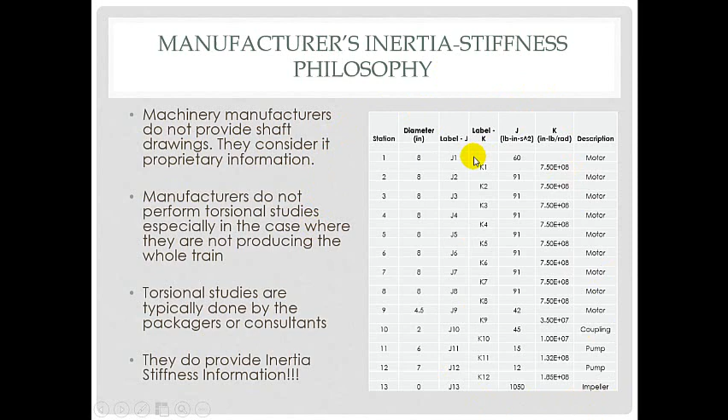so instead of providing shaft drawings, they calculate the inertias and the stiffness information, and they provide it in a neat table like this shown here, which they call the inertia stiffness model. What they do is take their rotor, for example this stepped rotor, which is just an example that I came up with, and they calculate the inertia and the stiffness for you, and then they put it in a neat table, and this is the information that you can use to do your torsional analysis.

Now, again, like I said, a lot of experienced people say that this inertia stiffness table comes pretty close to what is actually out there, but at the end of the day, it boils down to experience. It boils down to whether you can take real measurements in the field. But for the most part, these values can be trusted. But again, as a caution, if you have an opportunity to get more detail, always go for more detail in a torsional analysis.

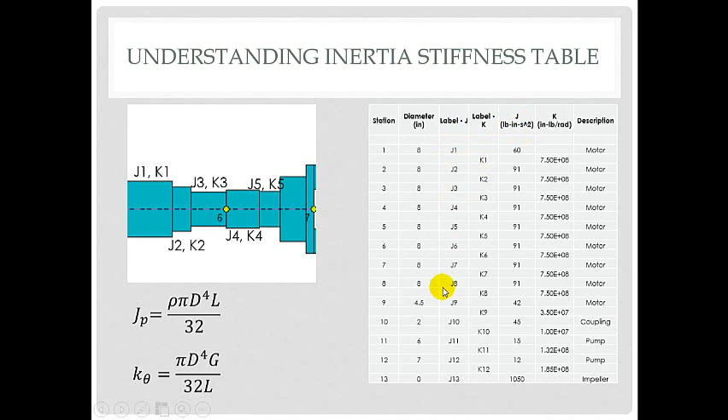So what they do is they take this shaft information and convert it to inertias and stiffnesses, and then they produce this classic inertia stiffness diagram that you see in a lot of vibration textbooks.

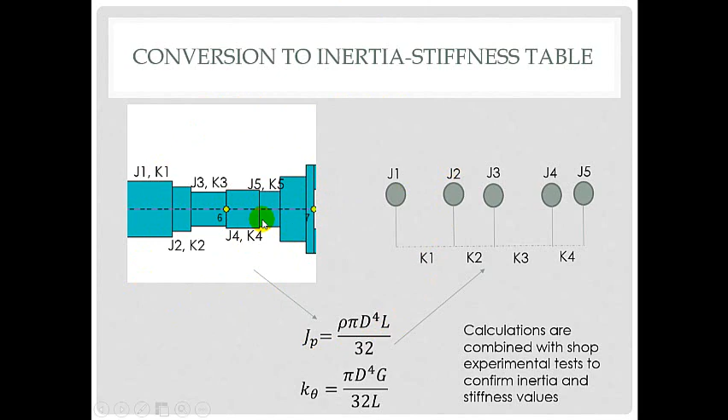And they combine these calculations with a lot of shop experimental tests, and they confirm their inertia and stiffness values. And of course, when you're out there in the field, when you take your torsional vibration data from field data, then you have a pretty good understanding of whether your calculated inertia values and stiffness values are close to what the manufacturers have predicted. So this is the way they go. They don't provide you this information, but they do provide you the inertia stiffness table.

So without further ado, I'd like to go ahead and model this inertia stiffness model. This is pretty close to a real system out there. I've changed up some values just to explain this a little better. And what you have is a motor that is driving a pump through a coupling, and the pump has an

impeller. So, the motor manufacturer has provided these individual inertias and individual stiffness information, and the coupling manufacturer has provided their inertia and their stiffness value, and then the pump manufacturer has provided their inertias and their stiffness values. So the entire model that you put together is going to consist of the inertias and stiffnesses of each particular

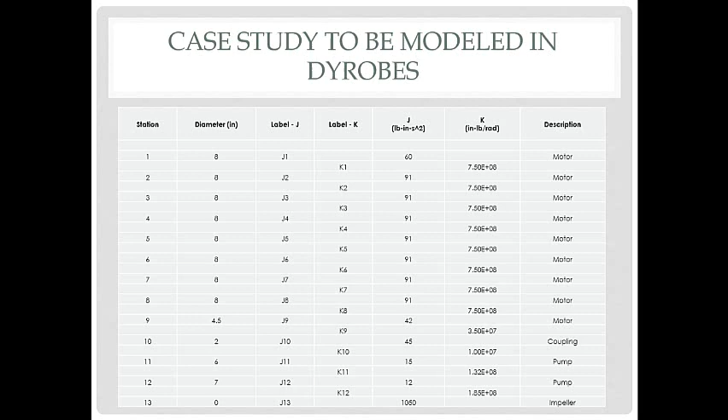component in the rotor. So without further ado, let's fire up DyRoBeS and let's go ahead and model this particular case study. And what we're going to do is we're going to shoot for calculating the torsional natural frequencies and the mode shapes for this particular model. See you in DyRoBeS. Hi guys, so let's get started.

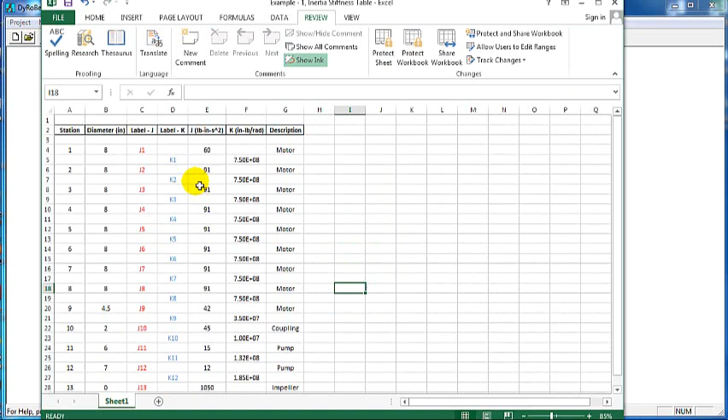I have DyRoBeS fired up here, and I've created this inertia stiffness model in an Excel spreadsheet, and of course this spreadsheet will be available on the website along with the DyRoBeS file and the presentation. So I'll park this Excel spreadsheet to the side here so that we can use it as a reference, and I will fire up DyRoBeS.

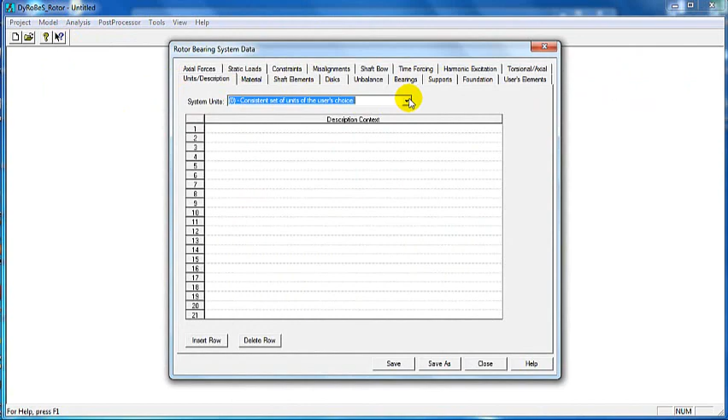And first thing you do, of course, is start with data editor like we did in the past, and of course you will start with your consistent set of units. So you got to pick your units. I have consistent English. Give it a description: inertia stiffness model of motor, pump, and coupling. Right, and then go ahead and click on material.

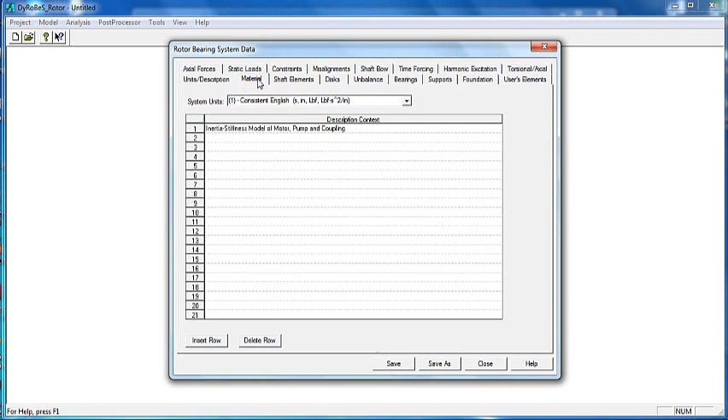Click typical steel, but of course don't forget this is an inertia stiffness model, so it doesn't matter. We're going to be setting all of these to 0 just like we did in the last lesson, and I always like to call them dummy material. And then after that, click on shaft elements.

So the goal of modeling this is to show you how to model a full system using the inertia stiffness method. Now, unfortunately, since we're using the demo version, we're only limited to 5 elements, and in this particular model we have a total of 13 elements. So we'll not be able to calculate the torsional natural frequencies and mode shapes due to the limitation.

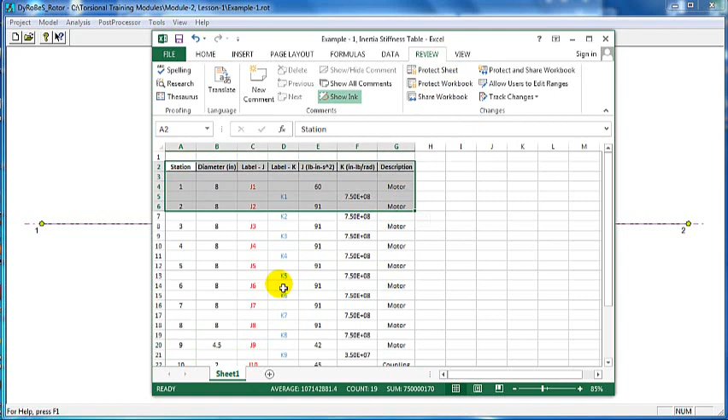But I will post the torsional natural frequencies and mode shapes so that you will be able to see what they are for this particular model. Now, if you happen to have the full version of DyRoBeS, then you will be able to calculate the torsional natural frequencies and mode shapes.

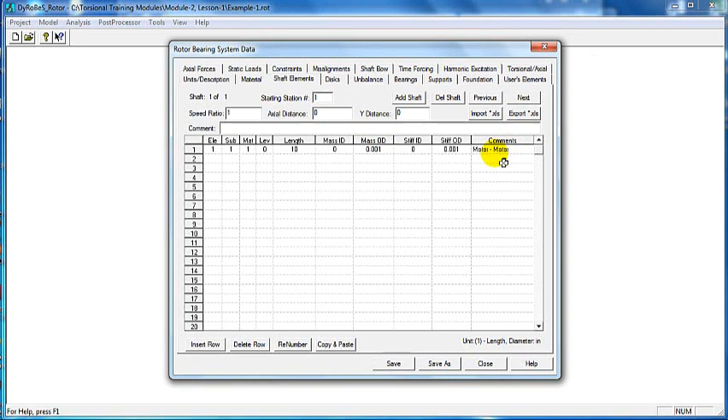So click on element and type in element 1, sub 1, material 1, level 0, give it a random length of 10, mass ID 0, mass OD 0.001, stiffness ID of 0, stiffness OD of 0.001, and call that motor to motor. And I'll explain why I wrote motor twice. Before you do anything, click save. Close, yes. In my case, I've saved it as example-1. You can save it as example-1 as well.

Now, here's one element, right? And this one element has 2 stations. It has station number 1 and it has station number 2. So, why I typed motor to motor under shaft elements is because when you type in an element, you're connecting two stations together by this element, and so this station is going to have inertia number one, which is here, right? And station number two is going to have inertia number two, right?

And they are connected by spring number one, right? K1. So station number one to station number two are connected by element number one. So that's why, if I gave this element a description, then the two that are connecting this element is motor to motor, right?

So it's not as obvious here, but if I scroll down to this part where now the motor and the coupling are connected, then I would call this element motor to coupling, right? So same thing, and in this case I would call this coupling to pump, and then in this case again it'll be pump to pump, right?

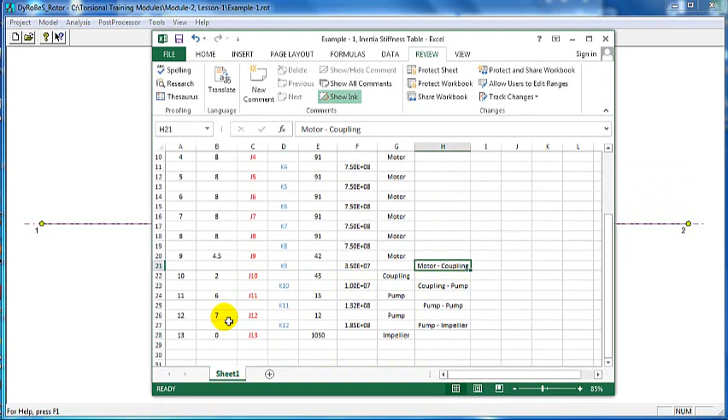So coming back to the rows, we have a total of 9 elements connecting the motors. Then one element connecting the coupling to the motor, one element connecting the coupling to the pump, one element connecting the two pumps together, and one element connecting the pump to the impeller. So in all, we have a total of 12 elements.

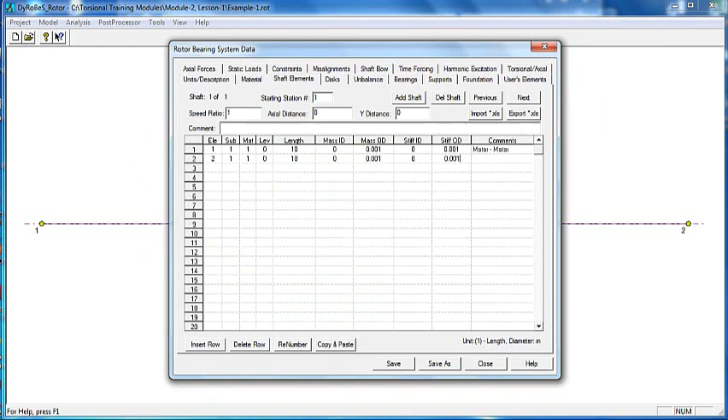So let's model this. Element number 2 will have a sub 1, 1, 0, give it a length of 10, 0, 0.001, 0, 0, 0.001, and again remember it's going to be connecting from motor to motor. This repeats for the next 9 elements, and your screen will look something like this.

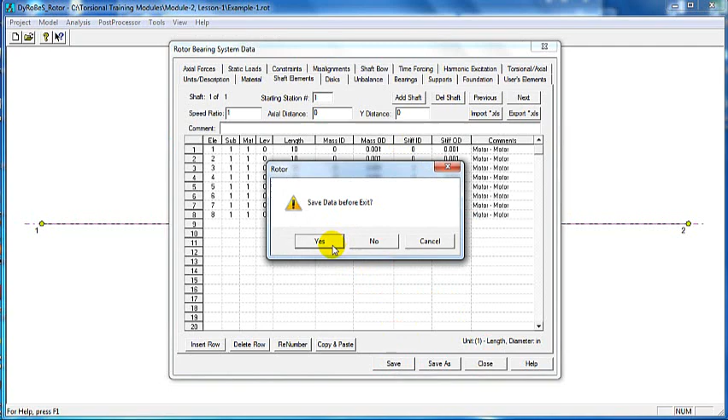So you have a total of 8 elements for the motor - previously I said 9 elements, but I made a mistake there. I meant to say 8 elements and 9 stations. Go ahead and click save after you type in all this information just like I have typed it in. Hit close, save data, say yes, and there you go. Now you have 8 elements and 9 stations.

So this will belong to J1, that'll be J2, J3, and so on and so forth until you have J9, right? And if you come back to your mass elastic spreadsheet or your inertia stiffness spreadsheet, you will have a total of 1, 2, 3, all the way to 9 inertias that correspond to the motor, right?

Then going back, now let's go ahead and model the rest of this inertia stiffness table. Go back to model, data editor, click on shaft elements, and element number 9, 1, 1, 0, 10, 0, 0, 0.001, 0, 0, 0.001, and now it's going to be motor to coupling, right? Pulling up the spreadsheet again, we have element number 9, that's between the motor and the coupling, and the element is called motor dash coupling.

Number 10, 1, 1, 0, 10, 0, 0, 0.001, 0. That's going to be coupling to pump, I believe. Let me confirm this. Yes, coupling to pump, right there. And then the next one, 11, 1, 1, 0, 10, 0, 0, 0.001, 0, 0.001. It's going to be pump to pump.

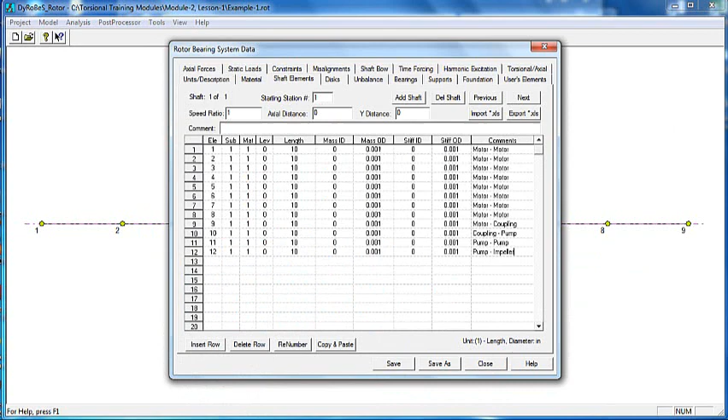The last element is element number 12: 1, 1, 0, 10, 0, 0.001, 0, 0.001. I believe that is going to be pump to impeller. So now you have a total of 12 elements and 13 stations, which corresponds exactly to what you have in the mass elastic spreadsheet. You got 13 stations right there, and you got 12 elements, right?

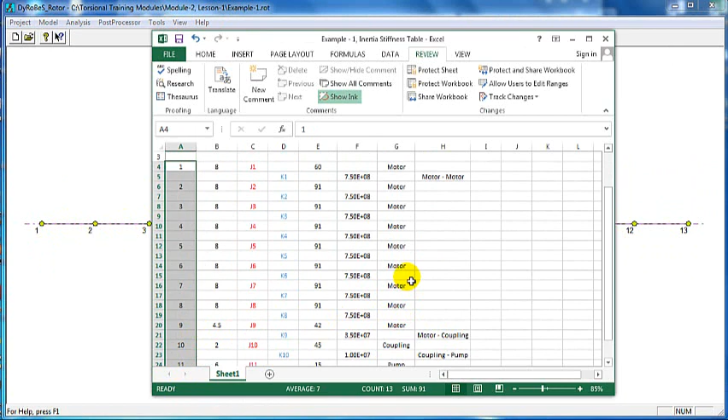So now, after you're done modeling your elements, the next step is to put in your inertias. Just like we did last time, click on disks and it opens up this disk menu. Remember, we're dealing with torsional information, so it's a rigid disk, and station number 1 will have no mass, no diametral inertia, but it does have a polar inertia. So go back, and your J1 has a polar inertia of 60, so we put in 60, and ignoring the rest, you can call this J1.

Similarly, number 2 has 91, and I believe the next 7 inertias, 2, 3, 4, 5, 6, 7, belong to the motor, and they're all 91. So your inertia table should look something like this, right?

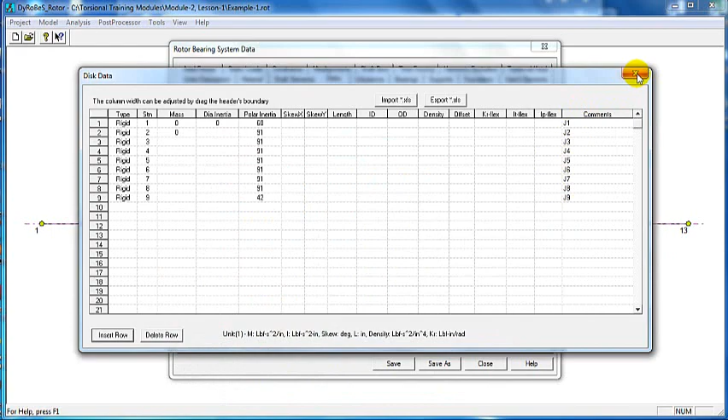And then the last inertia in the motor, inertia number 9, I believe is 42, so we'll put 42, and that's going to be labeled J9. So after inputting all of this, close this, hit save, hit close, hit yes, and there you go. You have your first 9 inertias that have been put in to model the motor.

So let's repeat this process for the coupling, the pump, and the impeller. Go back to data editor, click on disks, rigid number 10 of course has a value of 45, so station 10, 45, and it's going to be J10, rigid 11.

Your next inertia, J11, is 15, and it belongs to the pump. Inertia J11, and I believe the next one is also the pump, yes, and it has a value of 12, so J12, and last is the impeller.

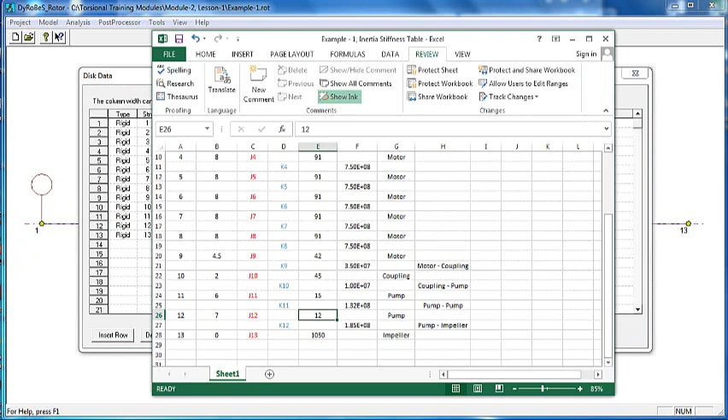I believe it's a pretty big value, yes, 1050, it's a pretty big inertia, which makes sense. An impeller will have the largest inertia in the pump, so that's going to be J13. Hit close, hit save, hit close again, and there you go. All your inertias are modeled in.

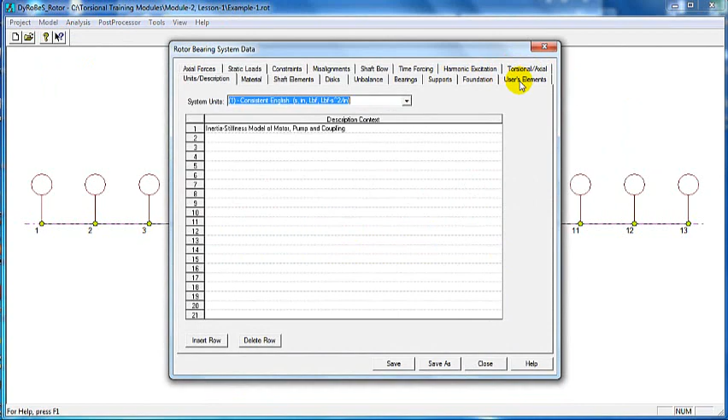So now the last step is to model in the stiffnesses, K1 all the way through K12. Let's go ahead and do that. Click on data editor, and if you remember last time we clicked on torsional/axial, and this is a linear model, so click on linear connectivity, and let's get started.

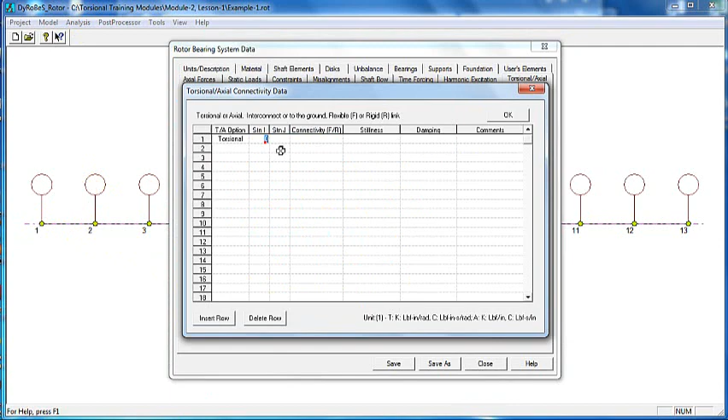T for torsional. Now remember, we're connecting station 1 to station 2, so going back here you have your K1, which is in between station 1 and station 2. Since it's torsional, we have a flexible stiffness, and your stiffness value is 7.5 e to the 8 inch pound per radian.

There's no damping, and remember, it is motor to motor, so you can call this K1. Torsional, 2 to 3, flexible link, 7.5 e to the 8, 0 damping, you can call this K2. This repeats for the next 8 or 9 stiffnesses for the motor, and your final screen should look like this.

So I have all the torsional stiffnesses modeled in for the motor shaft, and each of them had a value of 7.5 e to the 8, so let's confirm that. See, we had all 7.5 e to the 8.

Now let's put in the last few torsional stiffnesses. Torsional, connects 9 to 10, flexible link, and now we're connecting the motor to the coupling. So we have 3.5 e to the 7. Call it K9. And I like to always remind myself where I am, so motor to coupling.

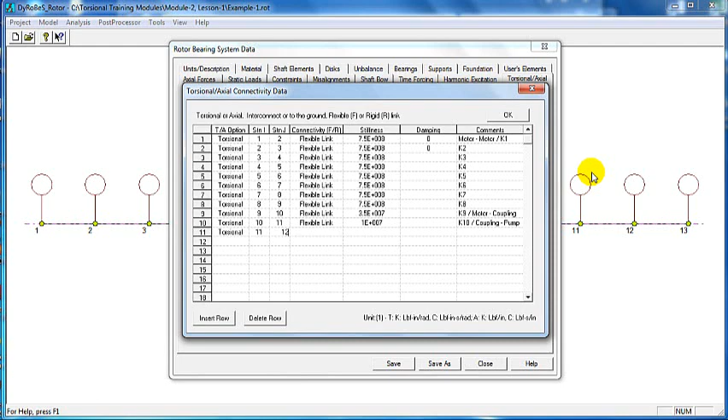Torsional, 11 to 12, flexible link. This is going to be connecting the two pump inertias, so that's 1.32 e to the 8. That's K11, pump connected to the pump.

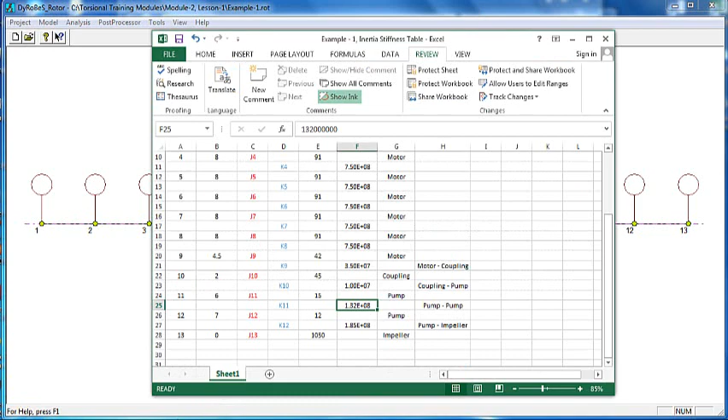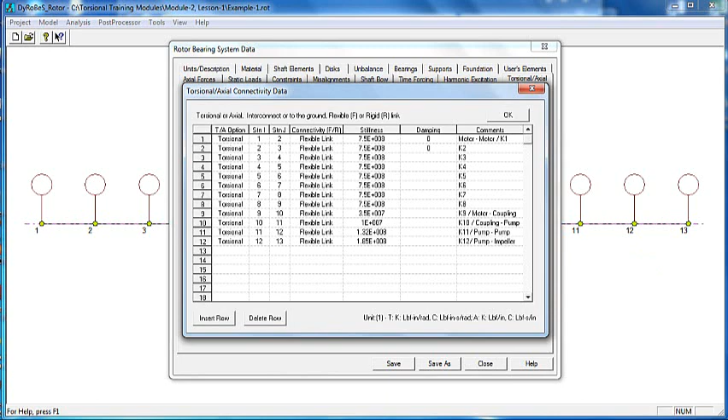And I believe the last one is the pump connecting to the impeller, and I suppose it's not a very stiff spring. Oh, it's pretty stiff. Okay, so 1.85 e to the 8... 5 e to the 8, and that's K12, pump connected to your impeller. There you go. Hit OK, hit save, close, save, and there you go.

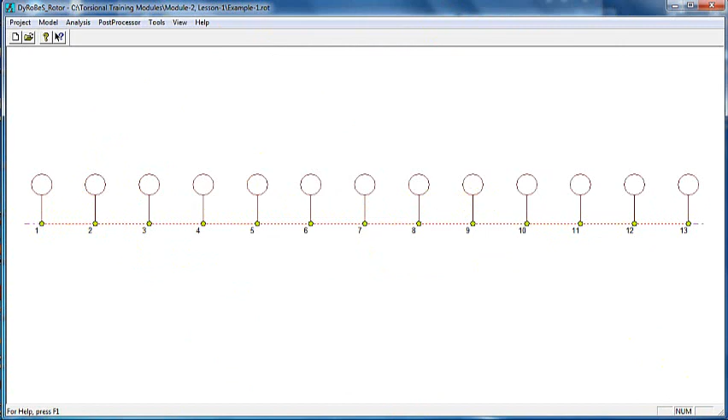You now have your full model in. Your inertias are here, and your torsional stiffnesses are all modeled in. So this is your first inertia stiffness model of a pump, which is being driven by a motor through a coupling.

Now I'd like to show you how we would calculate the torsional natural frequencies and mode shapes of this particular model. In your case, since you have the demo version, you will not be able to run this. So I'll show you how to run it, and then I'll pull up the full version of DyRoBeS that I have access to, and run the model and show you what the torsional natural frequencies and mode shapes look like. I will post these as part of the lesson plan.

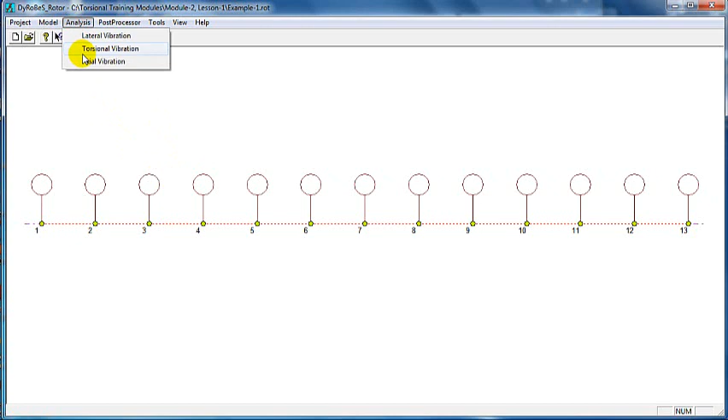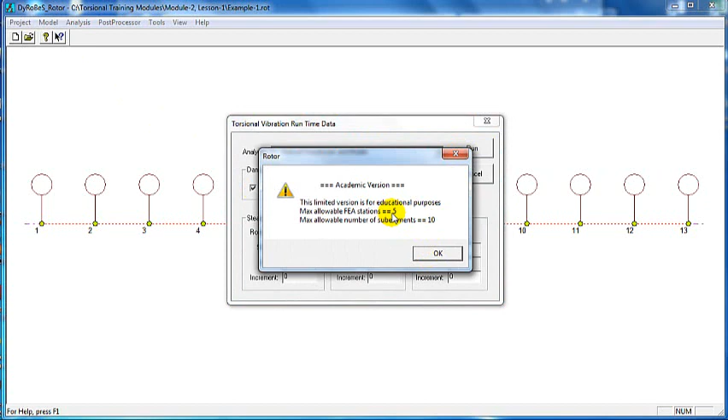So you would click on analysis, click on torsional vibration, and you've got your natural frequencies and modes. Hit run, and now it's going to give us this academic version limitation. I just wanted to show you this is what you will see since we have more than 5 stations, but nonetheless I will run it for you in the full model.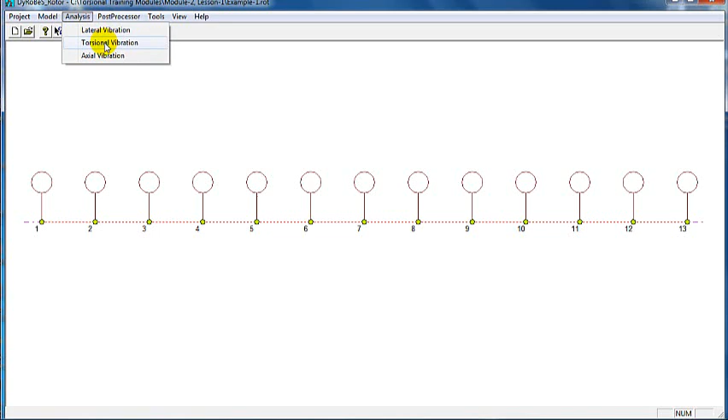So I have the full version of DyRoBeS pulled up here, and it looks almost exactly the same as what you have. I will now show you what I do to calculate the torsional natural frequencies and mode shapes. Click on analysis. Now I know this is the part that you don't have access to. In case you happen to have the full version of DyRoBeS, you can follow along, but I will post these natural frequencies and mode shapes on the website so you'll be able to see how they look.

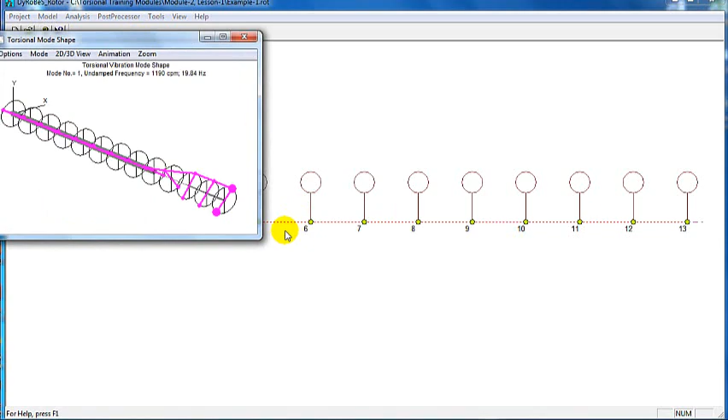Click on natural frequencies and modes, click run, and it solves. Click on post processor like we did last time, click on natural frequencies and modes, and click on mode shapes, and there you go. This is your first mode shape for this particular model, and I always like to animate these just to get a better sense.

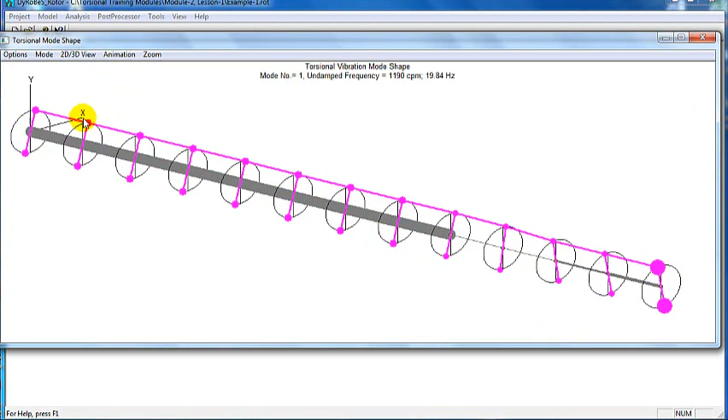There you go. So this is your first mode, and you can notice that your first few stations here belong to your motor. So your motor is vibrating together. All the inertias are vibrating together, and the flexibility that you have is in your coupling.

Let me go ahead and click on options and turn on the station numbers so you get a better idea. Recall that the first 9 stations belong to the motor, and the 9th to 10th station connected the motor to the coupling, and then the coupling was connected to the pump, and then you have your impeller, which you can see has a much larger inertia. That's why you have a much bigger inertia symbol here than you do for the rest of these.

And at the same time, notice that we had 7.5e to the 8 spring stiffnesses, and then these spring stiffnesses were less. So in this model, right off the bat, you can see that what you have is a stiff motor that moves together, and then you have a very soft coupling connecting the coupling to the pump. And so a lot of the flexibility that you have in this model is right here.

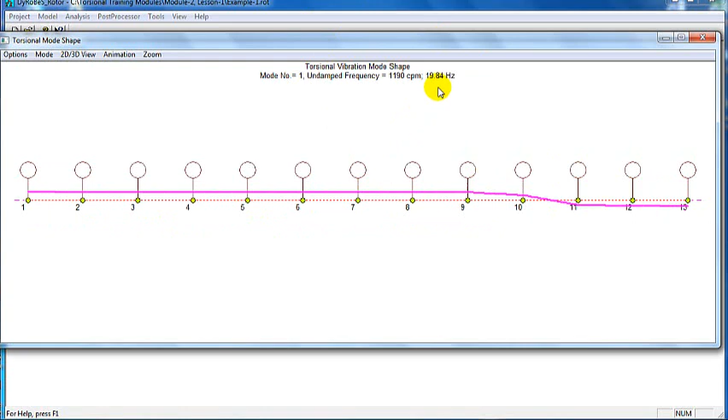So if you click on 2D view, you'll see this even better. Can you see that your motor is all moving together, but your flexibility here is in your coupling? So your coupling is a lot more flexible than the rest of your shaft. This is really the weakest link, is another way of thinking about it. And you have most of the flexibility here, and your first mode shape that it calculates is 19.84 Hertz.

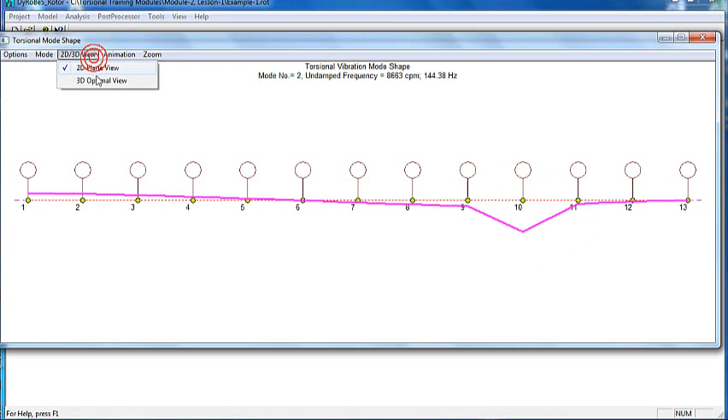Now if you want to toggle to the next mode, you click on mode and you hit increment, and there you go. Again, notice that your flexibility lies in this region connecting your motor to your coupling and your coupling to your pump. And if you look at the 2D view, you'll notice that there is a little bit of phase difference in certain parts of the motor itself. Like you can see this inertia at number 7 is out of phase with this inertia at number 1. So in this particular mode, your motor is also participating in this particular natural frequency.

Going on to the next one, now you can see that this is a pure motor mode, and one half of the motor is out of phase with the second half of the motor. And then again, you see a lot of flexibility where your coupling is modeled, but you can see that your pump is rather quiet in this particular mode.

And clicking the next mode, now you have a lot of flexibility in the middle of the motor. You have some flexibility at the end of the motor, and then you can see that your pump is also waking up over here. But you see this is a rather high frequency, 348 Hertz.

The possibility that we will excite such a high frequency, especially if it's an engine driven motor, it's pretty low. But again, it depends entirely on the application. In this particular application, I'll be surprised if we're exciting this particular mode. Truly speaking, the first 2 modes would be more concerning to me.

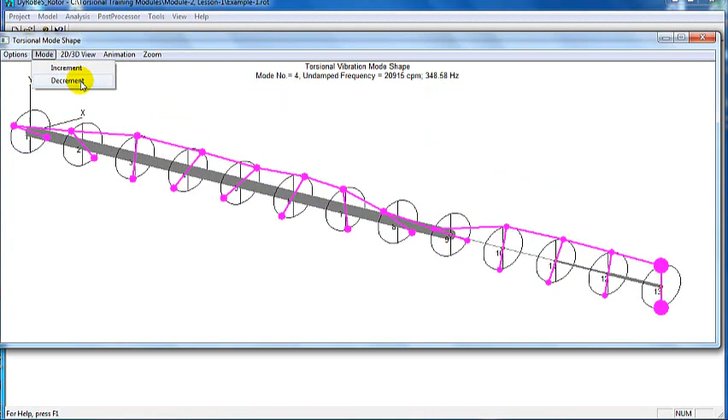So clicking on settings and typing mode number 1 over here, it brings us back to mode number 1 right away. And you can see that mode number 1 would be a really concerning mode because you have a lot of flexibility in the coupling.

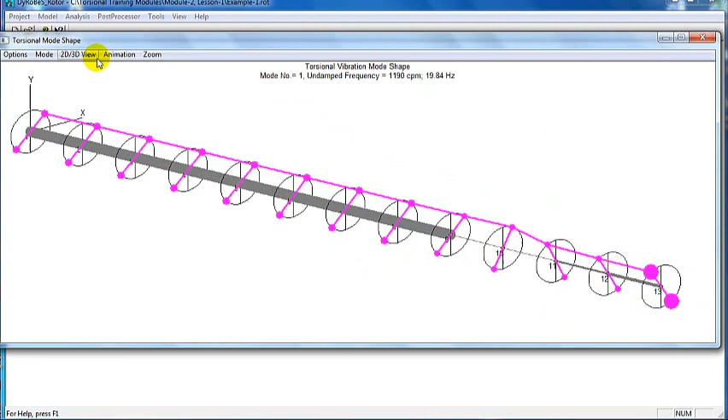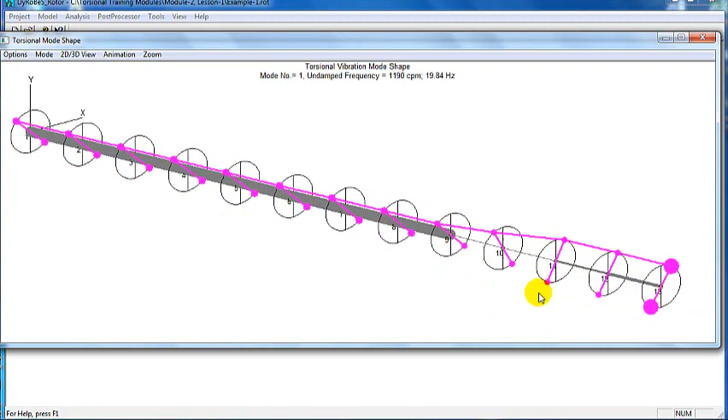And the way to interpret this is, if you have a machine that has a torsional vibration at this natural frequency, all your motor is going to move together, as you can see, and all your pump inertias are going to move together, and you'll see the flexibility in the coupling. So really the most likely place that you will have a failure will be in this coupling. You will see a lot of stress in this coupling, and this is where your failure would most likely take place.

If you were to toggle to the next mode, in this particular case, if this machine was running at the torsional natural frequency of 144 Hertz, then again you will have your motor, and you may have some high stresses here, but really again the flexibility is right here, and so you're most likely going to see a failure in this particular region that's connecting the motor to the coupling. So there you go.

This is module number 2, lesson 1.